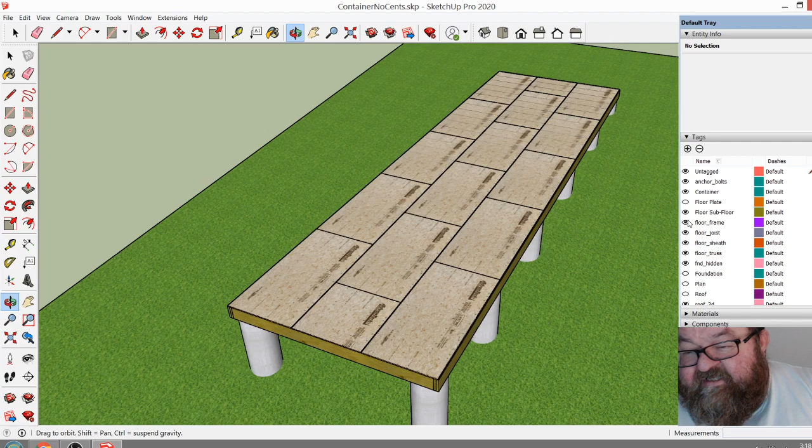So I wanted to get back to this point where I show how easy it would be to frame up a floor system just using 12-foot 2x10s.

That brings me to my first point about this: it's hard to live in a container, okay? The inside dimensions of a container are like 8 feet, and by the time you add your framing to get your insulation requirements, you're down to almost 7 feet. I'm a short guy, and I can almost reach end to end - I can spread out my arms and almost touch the walls.

As a matter of fact, we had a guy who used to work with us, a homeless guy I was trying to help get on his feet. He was like 6'6", and his wingspan was almost 7 feet. He could stand in a room and almost reach from wall to wall in a small house.

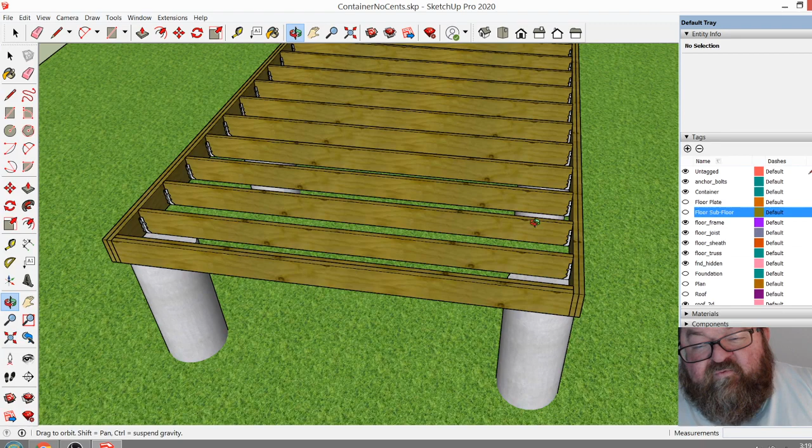But anyway, to me, if you're going to build a small home, a tiny home, make it 12 feet wide, and I'm going to show you why. The main reason is efficiency - when you start buying joists, like 2x10 joists, you'll find they easily span 12 feet. They'll actually span like 14 feet, but I think 12 feet keeps close to the dimensions of a container, and this would be very strong because they'll span a little more than this.

Now if you're going to do this foundation on a pier system like this, you'd have to double your outside band - your header joist would have to be doubled. It becomes a beam that spans between these, and you'd also have to put joist hangers on your joists.

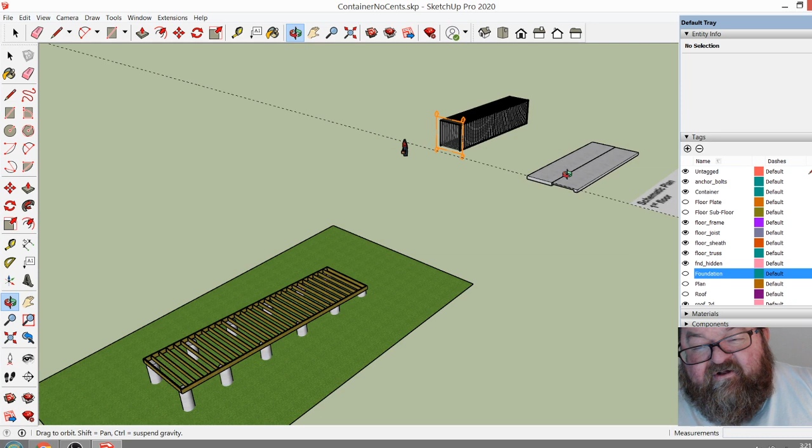Even if you had a flat yard, a flat lot you thought was flat, and you went out to form up a concrete slab, you'd see, wow, it's like 16 inches on one end and 8 on the other.

When you start paying for concrete for a slab, you realize how out of flat the Earth is.

The reason I was showing you this option is because I am going to do an option where you have a slab on there. But for now, I'm going to do this one.

I had a question earlier from a viewer today on one of my other videos about wall sheeting. I do want to let James know I'm going to get to that here in a bit. Be a little patient with me. I just wanted to go through the phases.

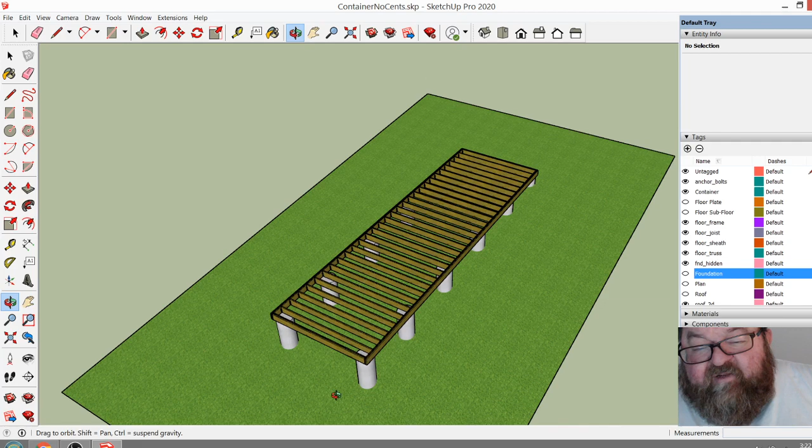Then what we're going to do is when we're done, we're going to add up all these, count the joists and all of our band and everything, and go to Home Depot to check the prices and see how much framing we can actually get. For this square footage, I'm guessing for the price of a container itself, I could probably frame up a bigger, more comfortable tiny home.

So, after your floor framing, you would have your subfloor. Where's my subfloor? I don't normally have this many layers. You would have your Advantech there, which is pretty common nowadays, and very efficient.

You would have 3 sheets wide, that's 12 feet, and 8 feet, or 5 pieces long, 1, 2, 3, 4, 5. By the way, this is 12 by 40. I don't really like the 40-foot length. I think that's probably too long for a tiny house.

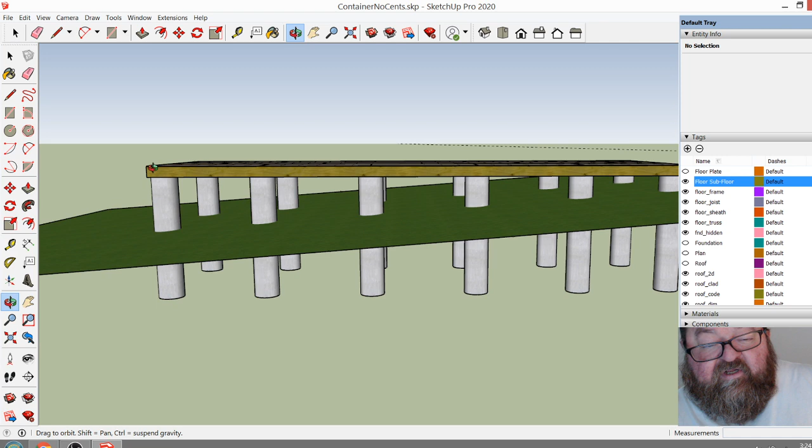What I would normally do is make the house more of a shorter rectangle, so it didn't take up so much of a footprint. Because you can see, and these sonotubes wouldn't be this long, but you can see that the longer your building is, the more it's going to come off the ground if you have a slope. So typically when we're designing for a lot, we look at the slope and take all that into consideration.

But then we would go to our wall framing, and this is where we get into setting the plates back. This is a question that a fellow named James had earlier, and I told him I would look at it in this video. So what we do is we set our walls back a half inch so that the wall sheeting...

...can set. That's funny, I got the Tyvek turned on that one, but so that it can set flush with the band that you're framing.

The reason we do that is there's several reasons. First of all, it's kind of a waste of material if you set the wall out. If you set the framing even with the band and the OSB hangs over, then you've got to fur out this band.

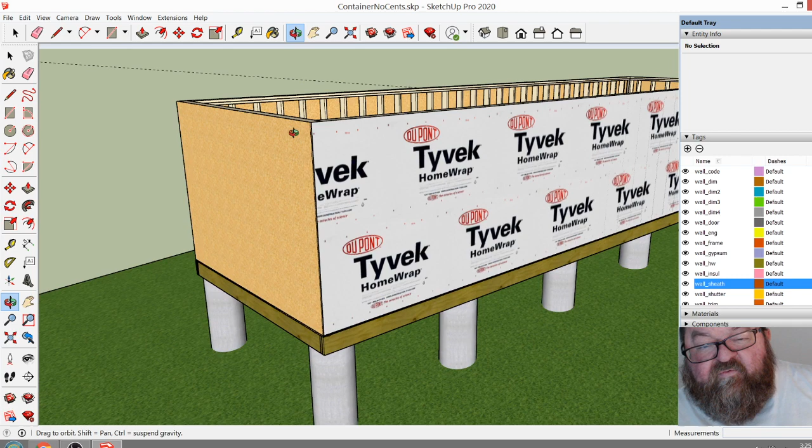So that's extra OSB that you've got to rip, and you might not think that's a lot, but that's basically 12 inches times 40. If you've got 8 times, you get 32. So that's 1, 2, 3, 4 - another 4 sheets of OSB. It doesn't sound like a lot, but you've got to cut it, rip it down, nail it on, and then you create this weird joint here.

In any event, it's not necessary. The other issue is bracing, wall bracing. The function of your OSB is to be nailed, and this extension I'm using, which is Medeek wall extension - how I draw these walls, and I'm going to draw some walls in a minute with it, so you'll see how it works - but it doesn't draw the joints in the plywood, the OSB.

Back when I was a kid, we used plywood. Now we use OSB 48. So that would be where your first joint is. The point here is that OSB is required to be nailed on all four edges.

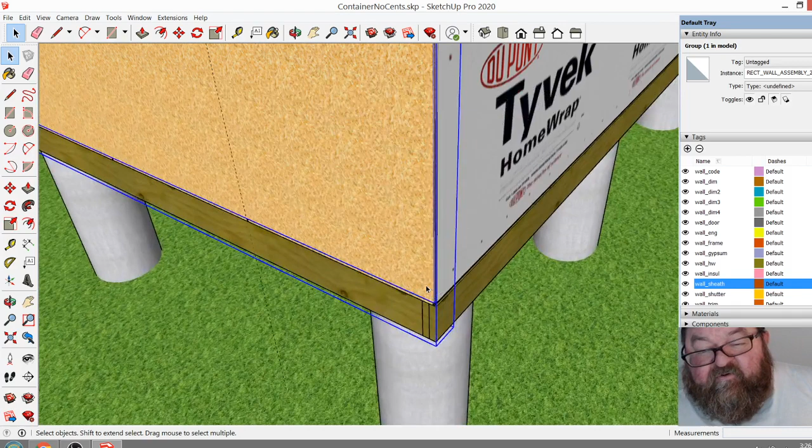And if you drop - and this was a question I got also - he was saying that some carpenters drop this down. Well, first of all, the wall in his scenario would be moved out a half inch, and then it would be moved down. They would move it down here.

I probably should just move the whole wall because I'm going to demonstrate something here. Let me see if I can just move the whole wall. I don't want to mess up my - I guess I've already done it. Oh no, I am moving it. Cool, okay.

If the OSB is out here, you can see I've scooted that whole wall out. And it wouldn't be out that far, sorry about the scrolling - it would be right here, basically. Then, if it was dropped down, let's drop this down.

Okay, you would have this gap up here. You see, the reason that OSB is 8 feet long is because it works out with your walls.

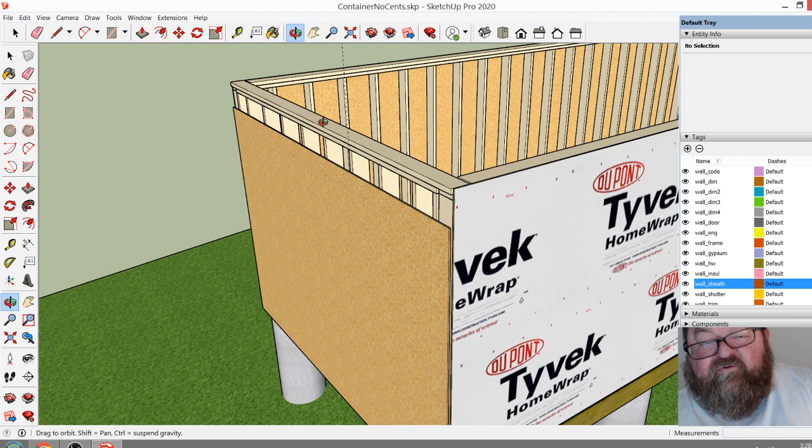Your wall is 8'1" and 1/8, and your studs are 92 5/8. By the time you nail a bottom plate and then a double, 2 top plates—the reason we have 2 top plates is to overlap walls at the corners and intersecting walls, so that it's very strong—but by the time you add that 4.5 inches to 92 5/8, you get 8'1" and 1/8. What that does is allow you enough room to put, say, 3/4 of an inch hardwood flooring, and then half inch to 3/4 inch ceiling material, and still have an 8-foot ceiling.

So you should see here, OSB is not made to span. The edges won't span between studs. You have to nail it at a minimum of 8 inches on center. That's in the field. You're supposed to nail it 6 inches on center around the edges.

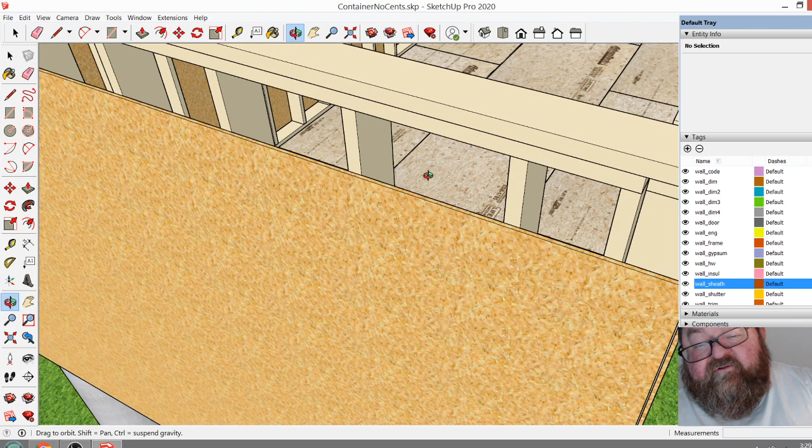So there would be 2 nails out here, and there would be nothing to nail to. You would have to block—put blocking between the studs just to have a nail. If a building inspector caught you doing this, that would be a good building inspector. One who didn't care would just say, that's cool.

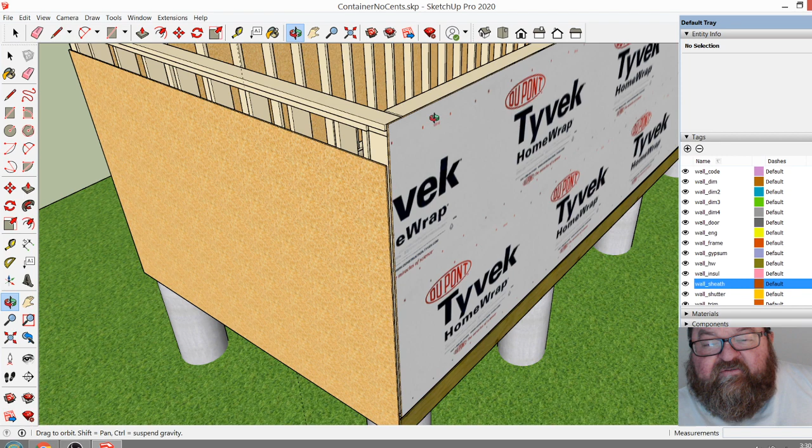The purpose of the sheeting is actually to provide bracing for the wall. There are many different types of wall sheeting. Back in the old days, we used what was called blackboard. It was sort of a crappy, lightweight board impregnated with asphalt—that's why we call it blackboard. It was like an insulation board. We would put plywood on the corners, and then we would put that stuff in the field, in between the corners.

Now OSB is so cheap that we just put it—let's move this back up—on the entire house, and it's actually very strong. It makes the house very strong, and your strength axis in OSB is vertically.

In other words, let's move the wall back—let's go back to where the wall's back there. So the reason we don't install the OSB horizontally is also the same reason.

We would have to block between the studs at 4 feet all the way, wasting material and labor. The labor on installing blocking between every stud is significant—I could frame up probably all these walls in the same amount of time that I just ran blocking between one wall. So it's a lot of labor, a lot of cutting for no reason.

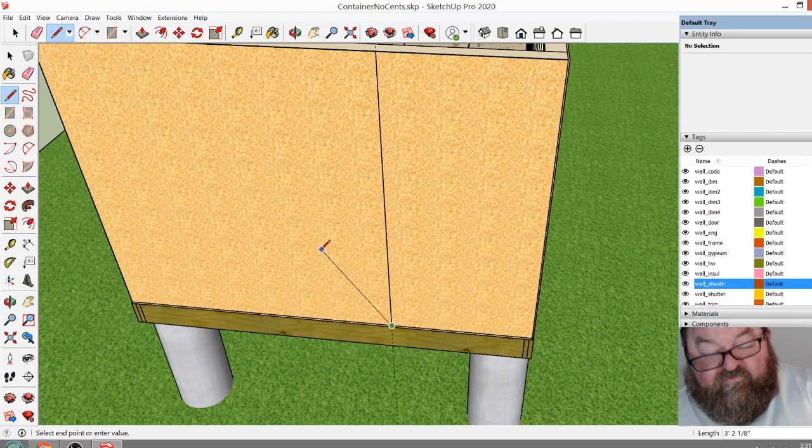We follow best practices and the way manufacturers recommend or stipulate how materials are to be used, and therefore we save time and money. All of these edges now—I would have a joint here, this extension doesn't put joints in the plywood—but every 4 feet I would have a joint, and there would be a stud or the top plate or the bottom plate all the way around this sheet.

They would be nailed 6 inches around the edges and then 8 inches in the 2 studs that are in the field in the middle of the sheet. So that's how that's done, and that's why we put our sheets the way we do. They're designed—and I was going to go back to the strength axis.

When you put up a sheet of OSB, you have this diagonal bracing effect here, because of the way it's nailed. This would replace the old style diagonal bracing that we used to put in walls.

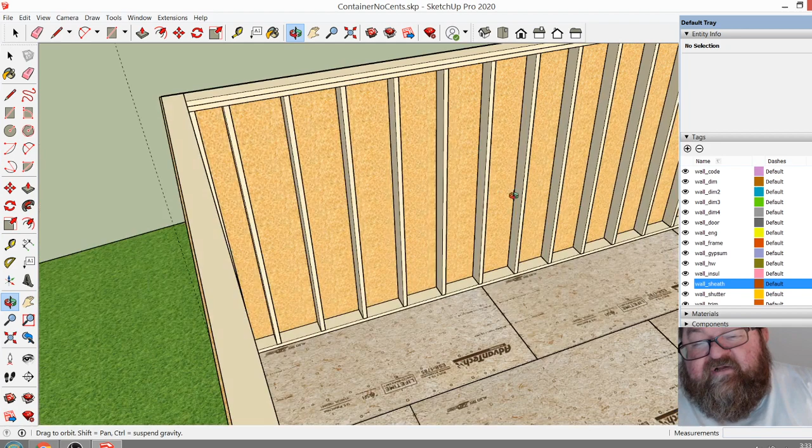Back in the old days when I first started in 1978, we would take a 1x4 and notch it into the studs so it was flush. That was our wall bracing, because we would put that crappy sheeting up on the outside and it provided no strength. There was no lateral bracing that way.

We had to put those corner braces up. Then in the 80s, they came out with metal straps that we would put up. They were 10 feet long, and we'd nail them up here, bring them down, nail them off at each stud where they fit. But those were kind of crappy because they were face nailed to the studs. They'd make your drywall lumpy sometimes if you didn't get them nailed good and flat.

But when OSB came out and we started using it, that was the answer. It gave us our sheeting, and it gave us our bracing for our walls.

Now the code also has requirements for shear walls, and I think it's like 30 feet—I'll have to go look. It's rare that you see a 40-foot wall by itself without any kind of intermediate wall, and that's what we're going to do here in just a little bit.

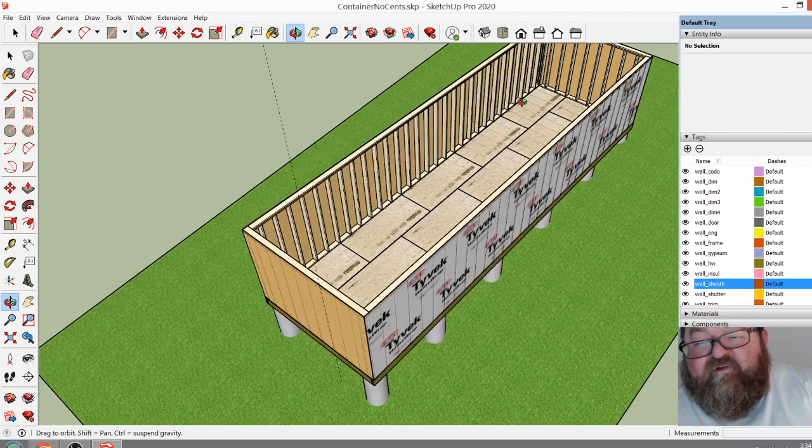We're going to put up some bedroom walls and closet walls. All those interior walls act as sort of shear walls. In other words, these big long walls, when they're hit with wind, they'll want to deflect inward and bounce around like a drum.

Those interior walls act like bracing. If you don't have interior walls, you would actually have to put several shear walls—I'm pretty sure they have to be at least 4 feet long. You would have to enter this into your design in some way to get them in here. You couldn't just build this 40-foot wall uninterrupted.

In length, you would have to have shear wall. Either that, or you would have to come and make a section of this wall—I think it's like 4 feet every 30 feet, something like that—that would have extra bracing in it.

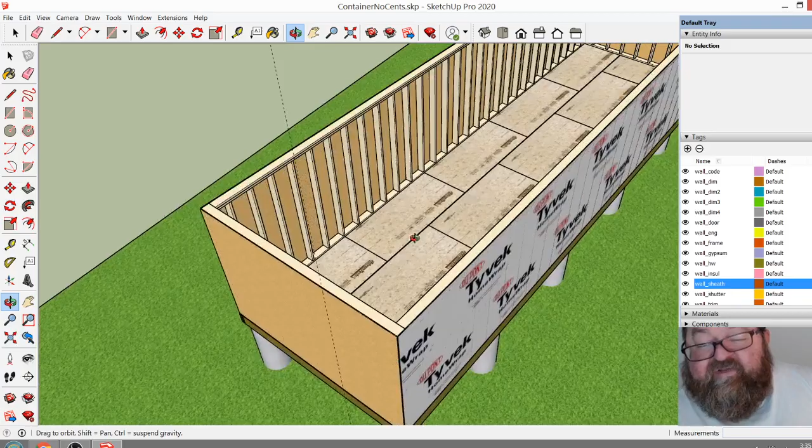There are different ways to obtain your bracing, but the easiest way is to have a decent plan where you have some interior walls, and then have your OSB on the outside. Now already you can see that this 12 feet is going to give you a standard living space inside.

And I promise you, when we add up all these materials—I saw my camera flash. Did I lose my camera? I saw the light on my camera flash. That's weird.

So I hope that answers the question of the sheeting. The other thing we don't do is let the corners overlap each other. This is the way it's done—the sheeting is just nailed, and it comes to the corner of the stud. You can't really get any closer.

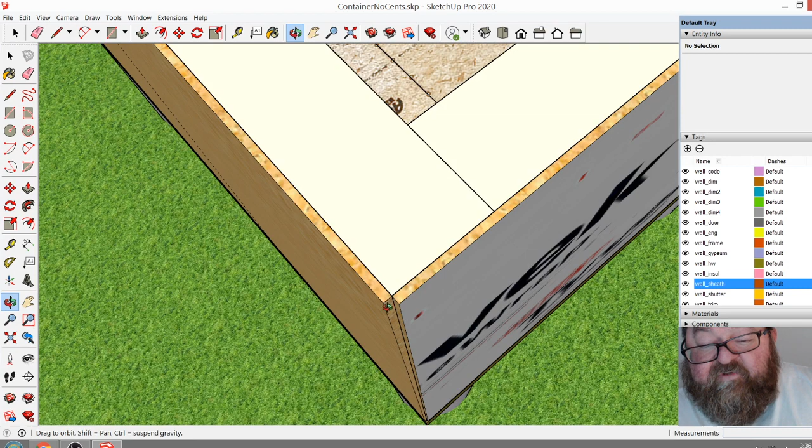But if you try to let this lap over that one, or vice versa, first of all you screw up your layout, because when you're laying out your studs, the layout is from the end of the wall, right? So you'd be a half inch off on your layout. The other reason is if you let one of these hang over past the other, you inevitably would have a lumpy corner, because one of them's a cut edge. We just don't do that.

It makes a crisper corner when you go to start putting on your corner trim—you don't have anything there getting in the way. So if you have a corner board, it wraps nicely around the corner, and you don't have any lumpy stuff overlapping there. And of course, the main reason is the layout issue.

So what I was going to do is bring up this option right here. I was trying to show people the point I made with this one was to get your insulation requirements inside. I think this framing is actually even bigger.

If you were to put this framing on the inside, I think I used the exterior dimension of the... can, the rust bucket. Let's see.

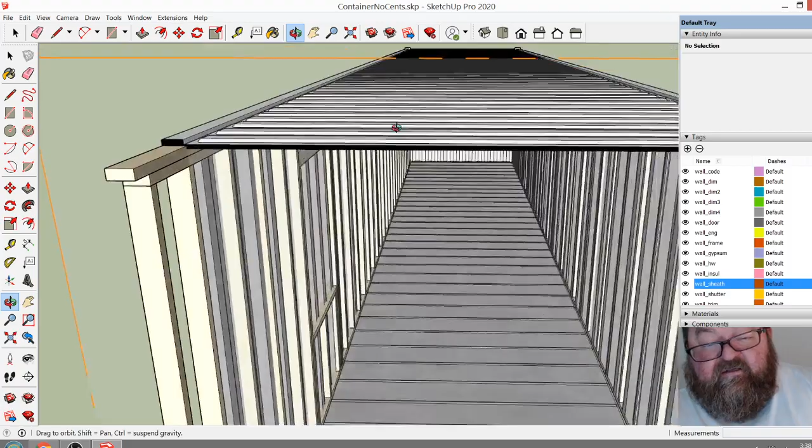Yeah, you see, you would have even less—about 7 feet basically inside, which is really not enough room to live. What you're doing is spending more money on something that forces you to have an uncomfortable living space. It's kind of ridiculous if you think about it.

People, humans need a certain amount of space to live in, and I've determined that 12 feet is optimal. That's the best width for a tiny home—I think 12 feet is the key. That's based on many years of building floor systems with just one span of joist that will span that far, and you want to stretch out your joist in an efficient manner.

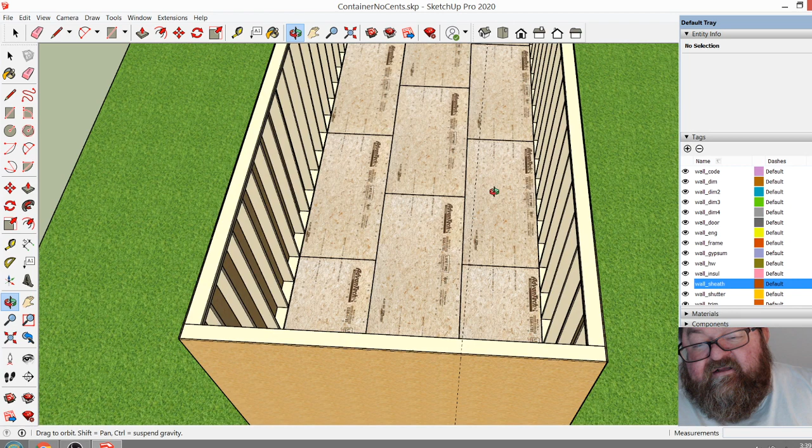There's no reason. Imagine this: if I had made this 10 feet instead of 12 feet, I would still have to use 2x10s, and I would still have to buy 3 sheets of OSB or Advantech to get that width. You see, if I go 12 foot, I've just bought a 12-foot joist, and if I'm buying 3 sheets, it'll cover 12 feet.

You've got to think about efficiency and the amount of space that you're going to need. The other thing that's kind of misleading, the biggest thing that's misleading about container homes—

I had this plan, I took it, I guess, somewhere off the internet. They're showing this bed basically takes up this entire bedroom, which is ridiculous. And these bedrooms don't even meet code. I'm pretty sure the code requires at least 75 square feet for the first person and 50 additional square feet, so you're talking about 125 square feet for a 2-person room. This room is only 7 feet by, what are they calling it here? Well, you can imagine it would have to be over 12 feet, it would have to be very long.

So these rooms don't meet actual code. You can get by with this stuff if you're out in a rural area where there's no building codes, but if you're going to be in an area with building codes, you're going to have minimum standards to follow. So I thought I would turn on this layer I've got called Plan.

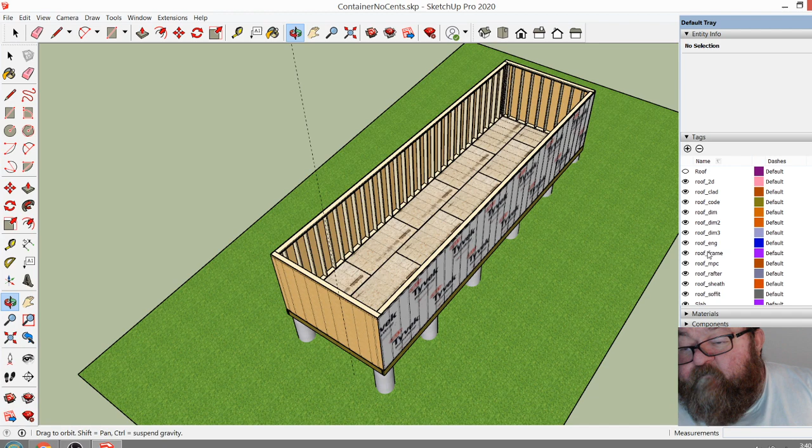I'm going to turn off the Advantech so it doesn't interfere, and I thought I would just lay out some rooms. Let me see if there's any questions so far.

No questions. Am I private again? I'm not. This morning it was so frustrating—I did this once and had it set on private, so the whole time I was thinking, not one person wants to see me rant about container homes. It's kind of funny.

But what I'm going to do is just do this on the fly, okay? I haven't really thought about this, but I think in my head I've come up with a pretty decent plan. I think a bedroom, for me, a minimum bedroom is 10 by 12, okay?

Let me just double click—I've got this floor, yeah, there we go. So I'm going to come over here 10 feet, and I'm going to come over 4.5 inches. I'm going to make the interior walls 4.5, that's a 2x4 stud with drywall on both sides. Let's see though, you know what—

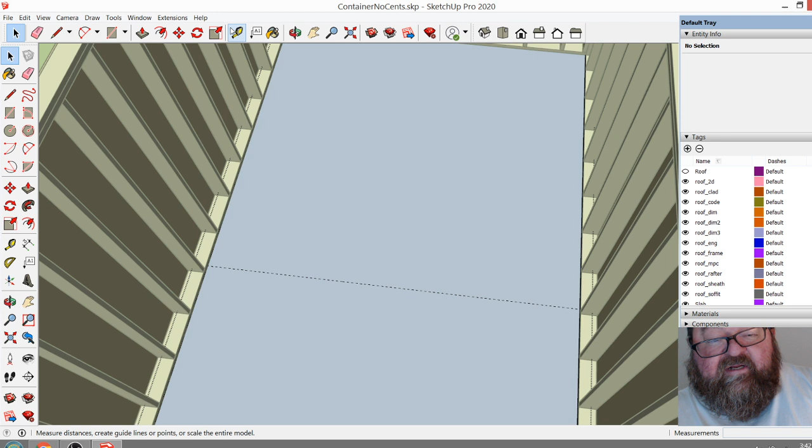I think this extension only draws... I'm going to draw them 3.5 for right now. I'm just going to draw the framing dimensions for right now, 3.5. Now that means I would normally add that half inch, but that's getting kind of nitpicky, so I'm not going to worry about that right now. Okay, so now that would be our bedroom.

Okay, that's a decent sized room. And if you're going to live in a tiny house, it's not like you're going to have 6 kids in this place, okay? You'll see in a minute, the idea I've got for the living area is kind of a multifunctional area. So the other thing is, we would need a bathroom.

You actually would need a closet. I haven't quite thought this through. I think I was going to run the bathroom 5 feet this way—or actually, no, it would have to run 8 foot. I always like my bathroom at 8'6".

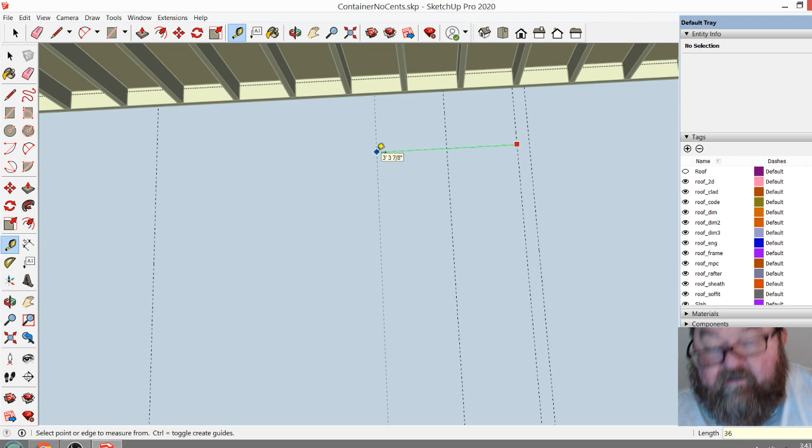Now that might be a little bit big for this, but you need, I like to have at least a 30-inch vanity—see how small that looks? And then you have to have at least, I think I do 36, let's do 36. Oh, I know what happened, that line wasn't right, that's what it was. And then we'll do 30 inches for the toilet.

For some reason—I've got a new computer coming, but this one's all screwed up. And then let's see, this would be, yeah, you could probably get by. I like my 8'6", okay? I'm going to leave it at that for right now, unless I have to move it over.

So you'd have a 36-inch vanity, 30 inches for the toilet, and your tub width. And then your tub would be 5 feet this way, okay? And then you'd have another 3.5-inch wall, okay, so that's that. Now let's see, we'd want at least a 3—

I was going to try to work out a closet here. We're really supposed to have a 3 foot... 36, oh, I think it's going to work out. Yeah, let's make that—let's see if we just come 2 feet for our closet. Yeah, we can get a little bit bigger hallway, and that's what we need to do, because the hallways get kind of, how much difference is there?

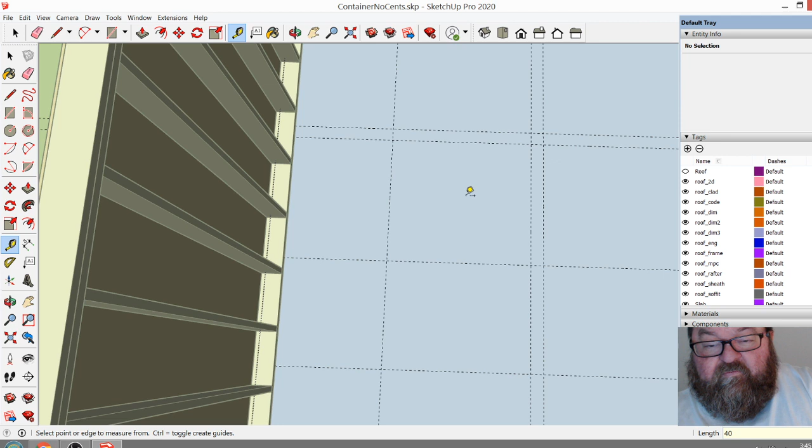8 inches. Let's make this 40. When you've got a long hallway, let's see, 3 foot 4. What would that leave us? 3.5. And I'm not looking for, you know, your standard closet is 2 feet. That gives me 2 feet 1. All right, let's leave it like that.

I like having this hallway here a little bit wider than normal because, you know, if you've got a couple of people, somebody trying to go into the restroom, somebody trying to get into the closet. And then what we would do, so we go ahead and have a door on there.

Let's see, I don't want to draw too many lines. What are they spinning around? I don't want to draw too many lines until I see if I've got enough room to get my kitchen in that I want to do.

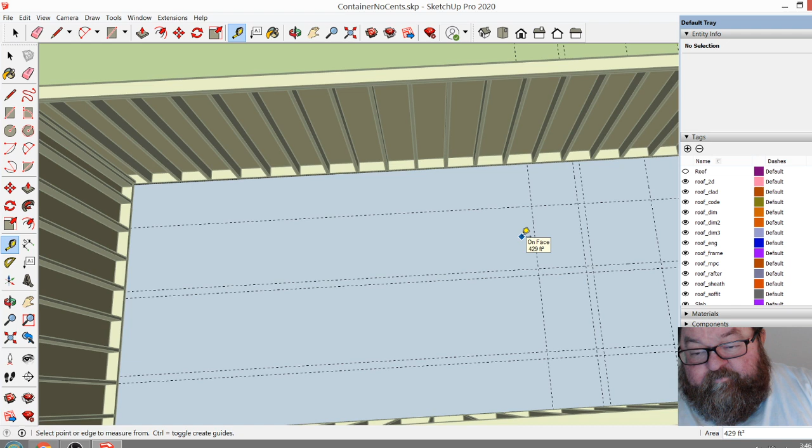So then I would have a counter here. It'd be 25 and then 25 off here. I always like to account for that 1-inch overhang. And then this would be, you'd want to come back, yeah, 5 feet. You'd want to just come to there with your cabinets. You want to go 3-inch increments.

And in this direction, let's see, before I go that direction, I want to have about, it'd be nice to have at least 10 feet coming back this way too. 10 feet. Yeah, that's going to be a nice little area. Not bad. And then this, we want to go 3-inch increments. So what is that? 7 foot 10.

That's 84, 94. So let's just go 90. And then we'd go back, and that would be our countertops. So I feel pretty comfortable now in trying to draw my walls in.

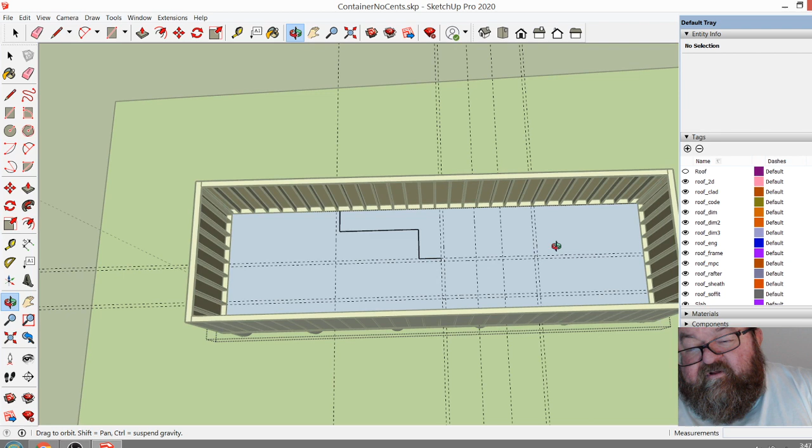Yeah, because what's going to happen is I'm going to have bedroom, bathroom, closet, and then you'd have a little space for an eating table right here. Then all this will be living area, and I'm going to try to work in a wood stove probably in this corner here. The reason I'm doing kind of a rough layout is because I have an idea for a porch that I think would work well.

So let me see, I may have to draw these walls just out of, I don't want to spend a lot of time drawing these walls. So let me see if I can just draw these walls right quick with making a quick, let's see, 8-foot framed wall.

Okay, let's load that. Let's see what that does. Which side? Yeah, that's on the right side. There we go. And why am I up in the air? Why am I? Oh, somehow I got up.

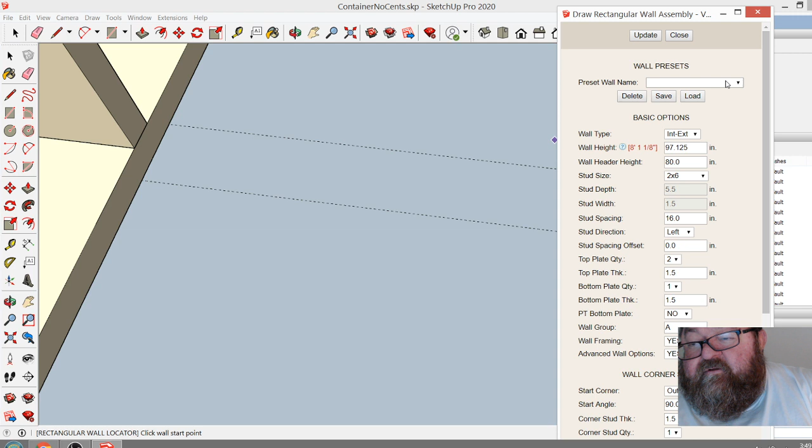Let's undo that. Somehow I got up in the air. Let's do that again. Let's start out down here low. Wall. 8-foot framed wall, load. Let's start down there. There we go. That's cool.

And then we would have one, let's see, we want to do our long walls first. So we'd want to do this next wall right here.

I have to close this, and I'm getting used to the new Medeek Wall for 2020. He made some, I can't load. He made some changes, which are cool. All of his extensions are really awesome, and you can see what kind of time they can save you.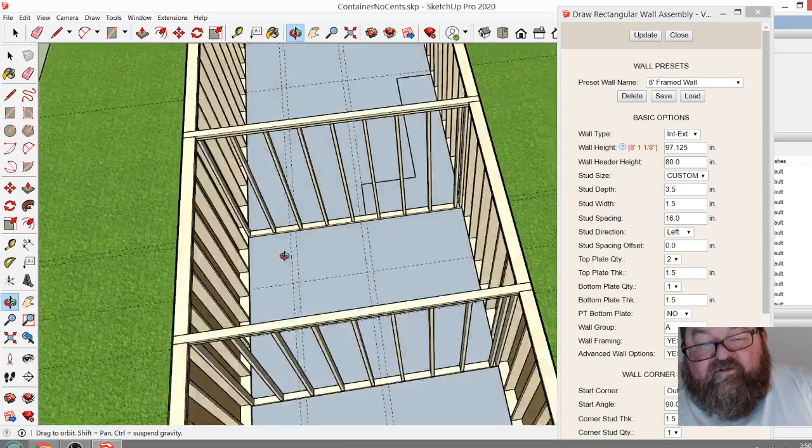Especially if you're like me and you want to do these material takeoffs, and the way you can make it easier doing the material takeoffs is that you draw all the studs and all the materials that you're going to actually have on the job.

You draw them. And can I draw another one? Oh, I got it. Okay. Do I have to load that every time, or will it?

I think it's the way I'm doing it is this. It's designed so that you just keep drawing in, linearly. You draw your walls. The way I've laid it out, they're all kind of segmented. So I just kind of restart it each time.

8-foot framed wall, load. I'm going to hit the load button whether I need to or not. It just makes me, what in the world? Where did I get to? That was weird.

There we go. That's really funny, that would be all your walls on the inside.

Now let's put some doors in. We'll see how this works. I wonder how intuitive this thing is. I don't have my center lines marked on the doors. Let's see what it will do.

Door. So these only need to be 2 feet, 8 inches. We typically use 2 2x10s, just because that's the way it goes. And right now we're just going to put...

That's pretty intuitive, I didn't have to do much there. It felt like it centered itself. That's cool, so you can see how awesome that is.

And then this door, let's see what we want to do here. Let me get out of this for a second. This door would be on this end here, and it would swing in towards your vanity. So that door would be a 2/6 door.

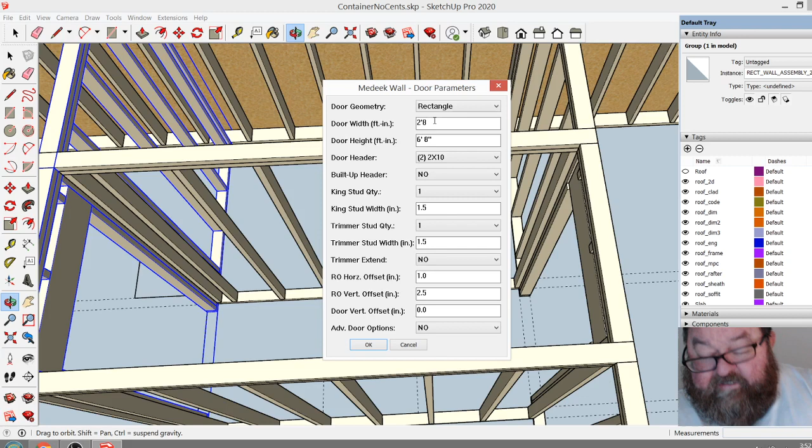Let's go back to our doors. 2'6", because the bathroom door is 2'6", and we'll put it right there. That looks good, and that's your 3 doors.

Oh, our closet door. Now in the closet door, I think what you're going to want to do here is just make it like probably a 5-foot door. You probably want... now one thing I thought was you could build a little closet on the end of this for linens or something. You could get fancy if you wanted to, but I think what might be best is just keep it simple and make this door big enough to where you can get to the whole inside of this closet. Let's see, door, so we're going to make it...

Oh, he wants it in feet, 5 feet. Okay, and we'll see if we can center it. Where's the center? There we go. Now see, I think you can reach... yeah. See, if you had shelving in there, you could get back to that back end corner on each side. That's good enough.

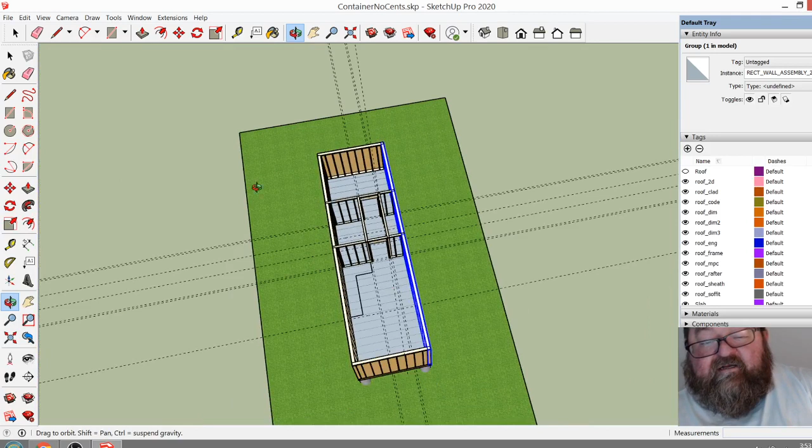All right, so now I can delete all my construction lines I had. Oh, I know what's wrong, they're in that group. We can clean that up. Come on, erase, erase. And now I can turn off... let's see, did I put that in? No, I didn't. So if I turn off this floor plan... oops. Oh, I gotta turn on my floor sheeting. And then turn on, let's see, go up here, floor, subfloor, there we go.

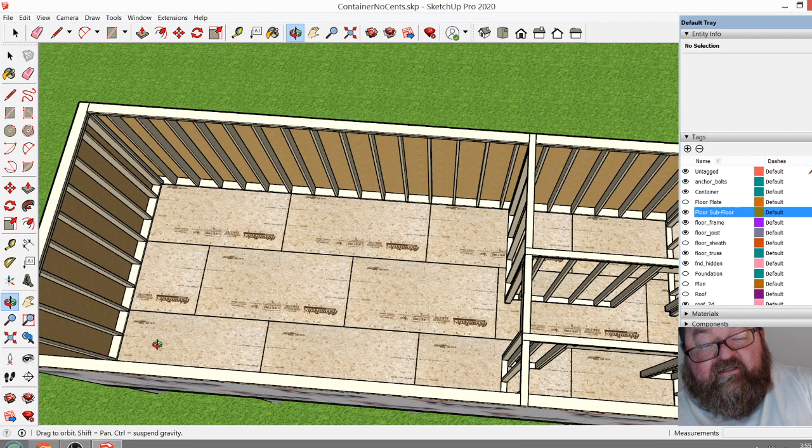But you can see that's basically all your walls. And this gives you a neat bedroom area, big enough. This is a standard spec house bedroom. Gives you closet, bathroom, and what you would do is you would put a door here and here, and that way if you had guests, you'd have like a sofa bed, a sofa that makes a bed. So in effect, you could sleep 4 to 6 people in this thing if you want to.

Now the next thing I wanted to kind of show, see if I have any comments or questions. What? No comments or questions? You people are boring. I'm just kidding.

So the thing I was going to try to come up with next is kind of a cool roof for this, because unlike container homes that are boring and rusty cans and will kill you if you lived in them long enough, because there's no way to get fresh air in there. I'm just kidding.

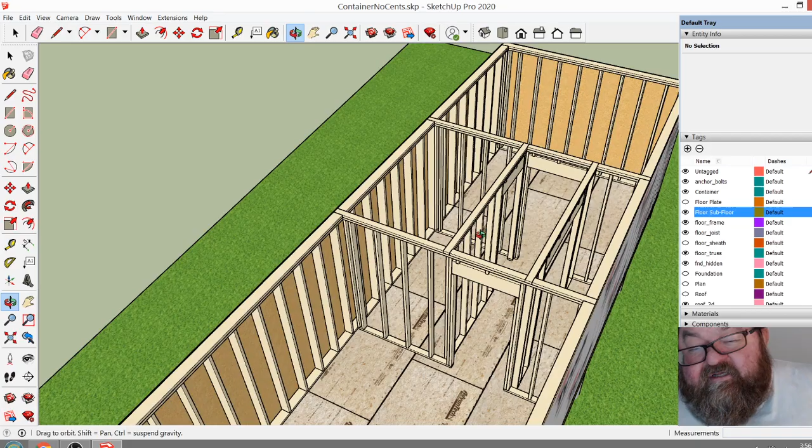I'm voicing all my hate for container homes, but you can see what we've done with just a few, what, 30 or 40 studs on these inside walls, some plate material, some headers. I mean, it's nothing, right? You would have framed up these walls anyway on the inside of your rust bucket, just to get your insulation requirements. And this is one thing I harped on last time, people say oh no, I'm just going to spray foam the walls. You have to have something to attach your drywall to unless you're going to paint the spray foam. And I can tell you right now, spray foam is ugly, it's not very pretty as a finished surface.

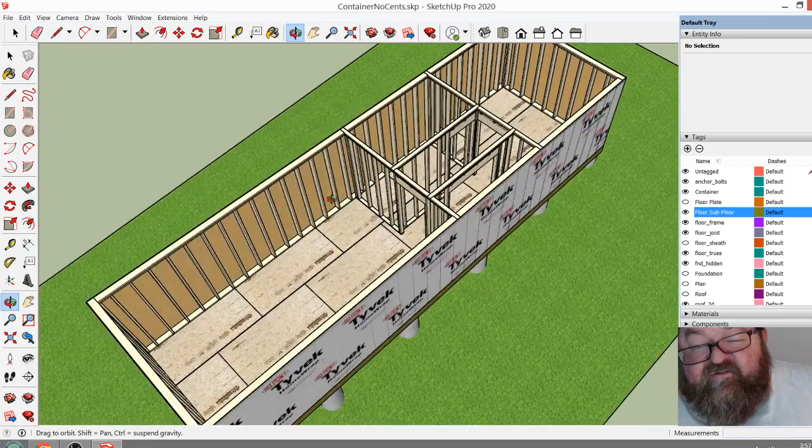You're going to end up putting nailers, which are called studs, on the inside, just like I've got shown right here. You basically would have your walls framed up. So my point is that for the price of that container, you can buy all this stuff. And it's new, it's freshly made, it's designed the way you want it, it's big enough to live in.

Let me just demonstrate something here. I'm going to take this container, I'm going to move it over here. Okay, and I'm going to show you how much space you're losing by using these crazy things. I'm going to move this back.

Okay, so the inside of these containers is like 8 feet, a little less than 8 feet. By the time you frame them out, you basically have no room to live in there. I don't know if that demonstrated that to you, but I would never waste my money on a shipping container. It's terrible. So what I'm looking at now is an idea.

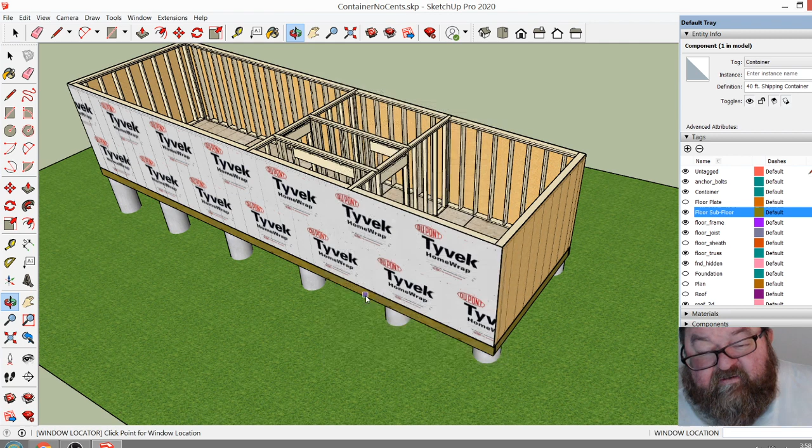Let's pop a few windows in here just for the fun of it, because I want to bring up a point about windows. We'll just leave these alone, put them in the way they are for right now. Let's just put one. Can I get to the center of this room? Up there. Am I hitting it right?

It's okay. Other point I wanted to make about windows and doors is that the way we build is in sequence. There's a reason for the sequence: you frame first, you do your sheeting, and then you put your house wrap on, your Tyvek, which is a miracle material. It allows water vapor to pass out of your building, which is created by you living in your building. If there's anything true about man-made climate, it's you farting inside of your bedroom. Okay, that's man-made climate change. But Tyvek allows water vapor to come out, but it doesn't allow water droplets, water molecules to go back in.

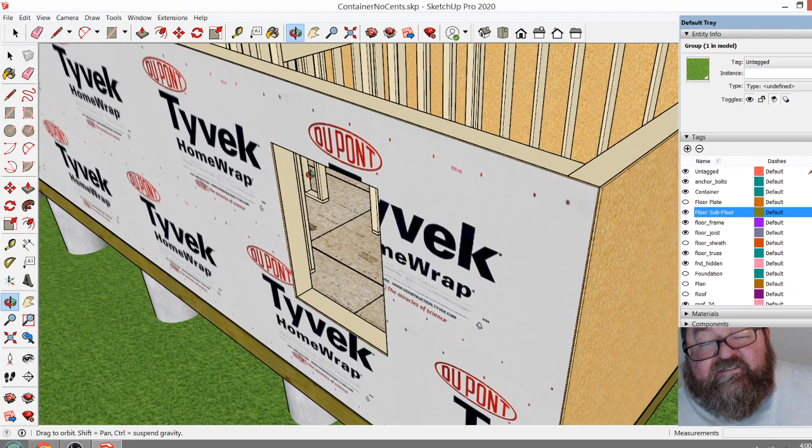Okay, just remember this is junk over here, and this is science right here. The other thing is when you put your windows in, your windows have a flange, and you tape, you install - do a search on Tyvek window installation, Tyvek and Tyvek tape window installation. What you'll see is they cut this upper part at an angle that's raised up as a flap. We install our windows - when I say they, it's me, I'm a builder. We install our windows, we tape around them, and we lower that flap over the top flange, and that gets taped. It's all very much a system.

Okay, when you try to put a window in a container home, the best that I've ever seen anybody do is they'll cut a hole. They'll take a torch or a sawzall or something, they'll cut a hole, and you never see them, you never see how they install the windows. Never. If someone can show me a video of someone installing a window into a container home, I'd love to see it, because there's really no way to seal properly around a window.

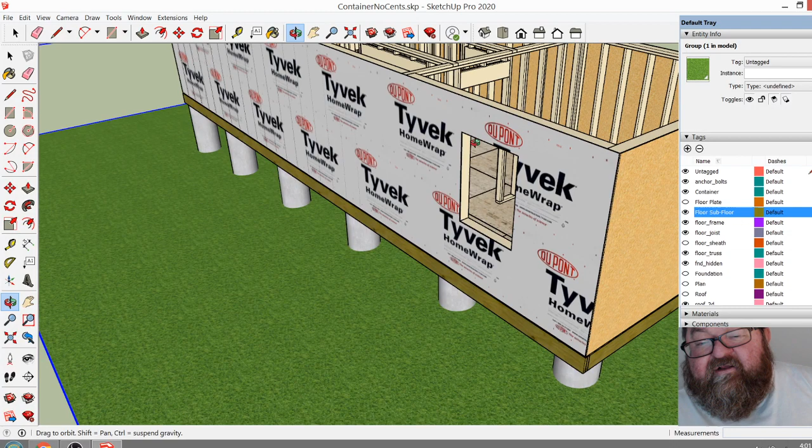The only thing you can do is cut a hole big enough so that you can frame in a regular opening like this. Say you cut a big swath of siding out of the side of a container, and you framed up your opening the way you were supposed to, and then you put your Tyvek around it and you taped it, and that's fine. But then you got to go back - it's really building in reverse. It's backwards thinking. Shipping containers are backwards thinking. It's like going and living in a cave again. And we moved out of caves, so sorry about that.

So anyway, what we'd have here, we'd have our front door. Let's put our door in, we're going to call it 36. We'll just leave everything else alone for now, and we're going to put it close to here because we don't want to waste any wall space. We'd let that door open against - we'd probably move it, I usually put 3 2x4 widths here, I don't put them that close. As a matter of fact, I'm going to undo that and see if I can do it from this side so I can see.

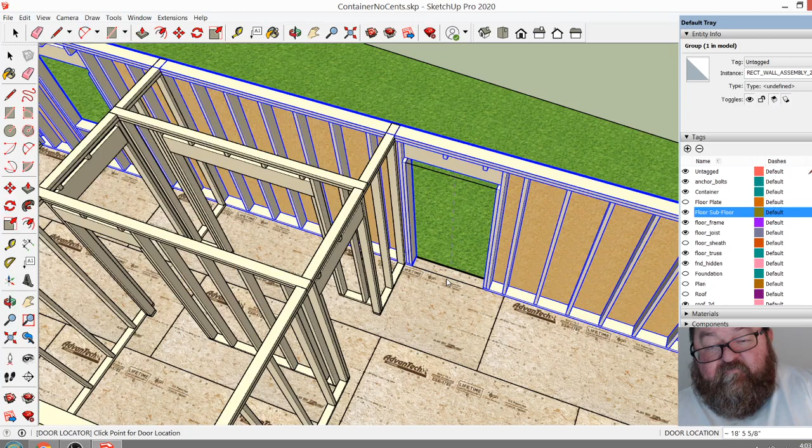Put it right there, yeah, that's more like it. You want a good space, you want space when you're framing these. You really want 3 2x4s. You want a stud, you would have a stud right here that's your T. They don't really put this extension - doesn't put the T's in the wall, which is how you join 2 walls together. So you'd have 1.5 inches there, then you'd have your king stud and your jack, so you'd have 4.5 inches here. That gives you room to put on a wide trim and still have a little corner there, drywall. But your door would swing back this way, and that's an efficient use of space. Now, the other thing that I wanted to do was to have a big...

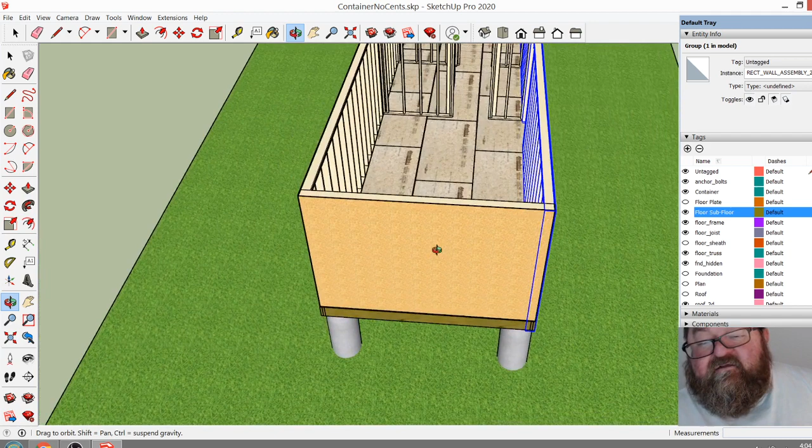I'm assuming the reason we oriented our shipping container home in this direction is because we had a view, probably on the end. So let's put a window here. The nice thing about these windows is we can change them. Let's make it two 3-footers, so 6 foot by 4 foot 6 — that's a nice proportion. We'll get it centered here.

That's going to be your view, your one splurge when you're sitting in your living area. You still want a little wall space on each side, especially for putting your wood stove in this corner, a sofa and coffee table. You'd have enough room for another chair, like a lounge chair with a beer cooler next to it.

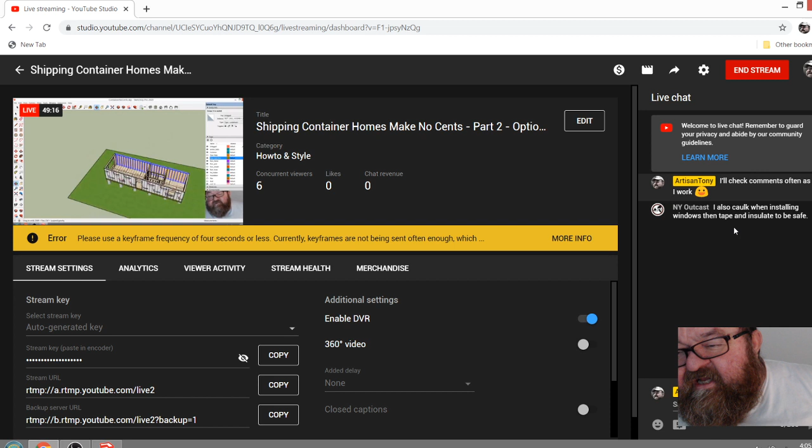Someone mentioned caulking when installing windows — you're right. I'm not explaining the entire process, that's why I said go watch the Tyvek video, it's really good. It shows caulking around before you install the windows, caulk behind the flange, then tape over the flange. I guess what I was trying to do quickly is show people how much easier it would be to frame up their own tiny home and have more space and save money. But the internet doesn't always like that kind of stuff.

So what I'll do here is put that same size, pretending like we have a view both ways. Honestly, I don't like putting a lot of large windows in homes. Let's center this one over that pier right there.

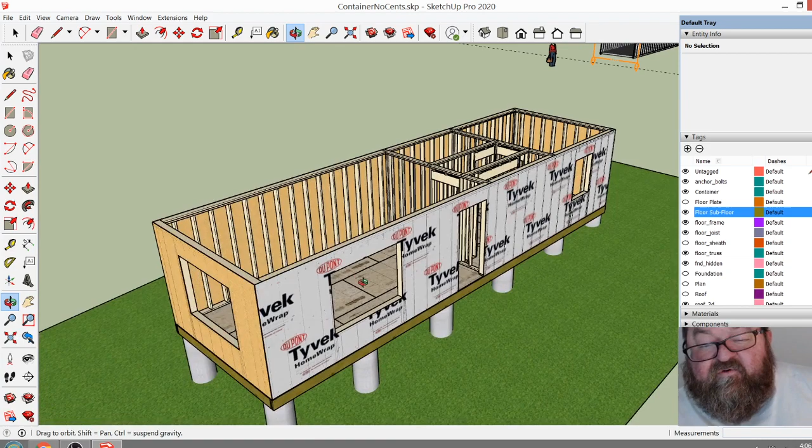Your windows are your largest energy inefficient element — not efficient. The R-value of your glass is maybe 1, depending on what kind of window you buy. Most people don't spend that kind of money on windows, so the more glass you have, the more heat loss and heat gain you're going to have.

So let's say this window meets egress. The other thing is in your bedrooms, you want to leave at least two walls for furniture, because you know how women are — they're going to want to come in and say, should the bed go here or should the bed go here. So you don't want to put windows on every wall in a bedroom, unless you're going to put a bed in front of the window, which is fine I guess.

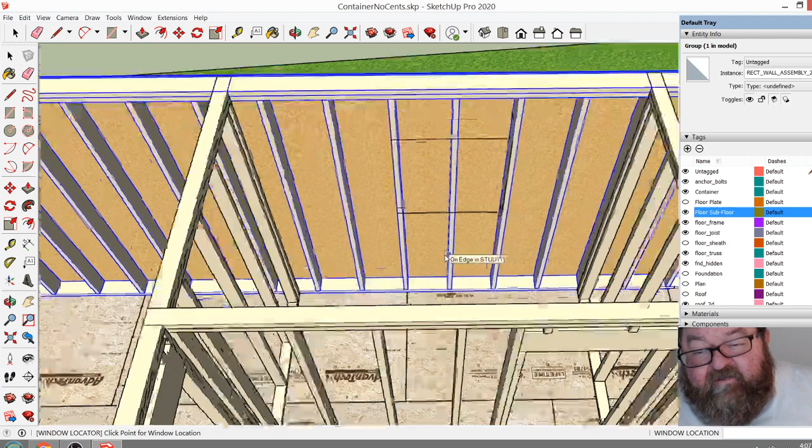Mainly my thing is you want enough natural light in every room. As a matter of fact, I put windows in my potty rooms, yes I do, but a small one. Usually I'll make it smaller than this, around 2'8" by 2'8", a smaller window, and that'll go right above the toilet, right there somewhere. That's really kind of big looking, now that I look at it.

I can't remember — these 28 by 28 windows I buy, these vinyl awning windows, are really cool, I like putting them in bathrooms, but I'd make it 30 by 30, not 32, so it's 2.6 by 2.6. You just want it over the toilet space, and leave wall space for your vanity, mirror, medicine cabinet, with the shower on that end.

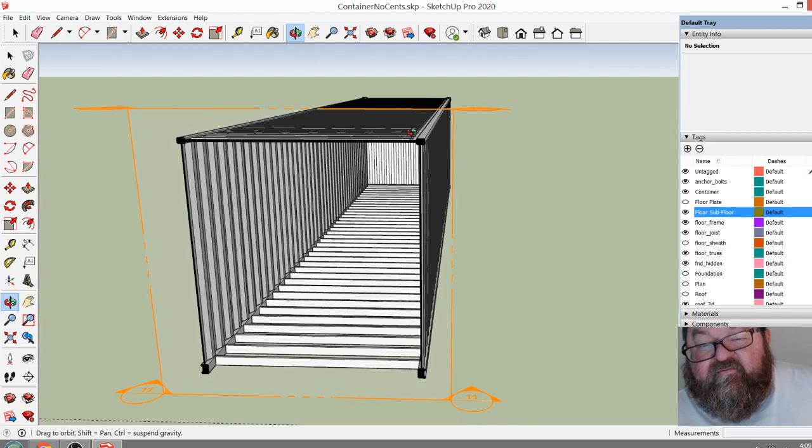So the point is, you've got natural light in every room, okay? This is kind of going overboard, but I'm trying to give a little here on design issues. What's funny is you'll see people cut big holes in these containers, expecting that top channel to carry the load of the roof, but it really won't. The channels on top of these containers are really small, not that big. They've got a big channel down here to carry the floor load, but the containers aren't designed to carry loads except on the corners.

You see, they have these corner posts that when they're stacked on top of each other, these are connection areas. They use these areas to put bracing rods. When they stack them up, they have big rods that they brace them off with, and they attach them to the ship. So they have devices that attach the bottom to the ship, and these other holes attach the containers together. They also allow these big rods to come down—sometime look that up, search that, it's really interesting.

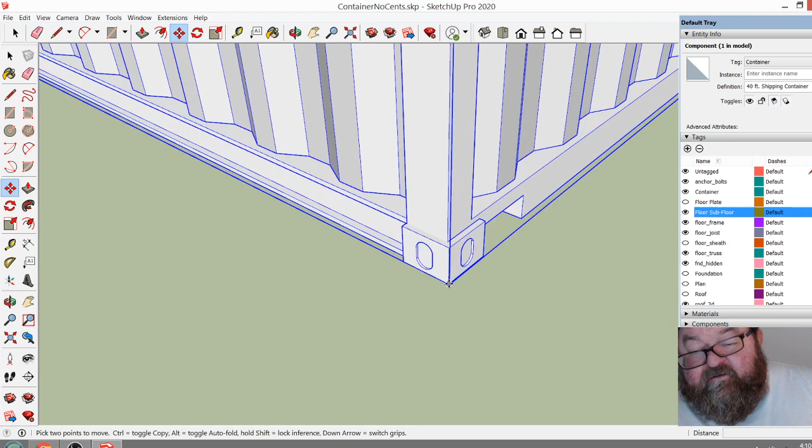But the point is that they're not designed to carry loads on the roof. I'll demonstrate this right quick. When you stack a container, there's actually a gap between the floor of the one above it and the roof below it. This roof is not carrying any load. This floor carries the load of everything inside—you might have 60, 70,000 pounds in a container—but that floor carries all of it. The roof carries none of it.

So when you start building a house on top of a container, you really need to reinforce it. Your building inspector is going to come and say, well, where's the header on your windows? So you're basically going to have to do all this framing that you would have to do anyway. And that's really the whole point I'm trying to make.

So the next thing I want to do is, I got this cool idea for a porch, and I don't want to spend a lot of time on the floor of the porch, but I'm not sure if... let me see if I got any questions.

I'm sure you know Tony, just pointing it out for the rest. Oh yeah, no, I'm agreeing with you, New York Outcast. Standard windows are crap. It's always good to get good ones, yeah.

Now, there's a window company called YKK, and it's kind of a builder secret. You don't see them if you go to your standard builder. Is it YKK? That's not it, not YKK. What is it, YKK Windows? Yeah, okay, I thought for a minute I was thinking zippers.

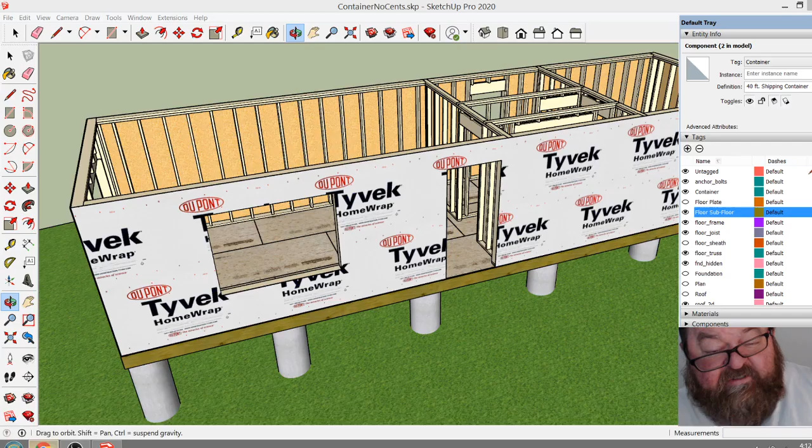But anyway, there's some really good vinyl windows in the industry right now that have good ratings, but they're affordable. If you go buy cheap vinyl windows that leak like a sieve, you're going to need big roof overhangs on your house just to protect your windows.

Yeah, I would never buy windows at a big box store. I'll buy framing lumber all day long from Home Depot and Lowe's, but actually I buy it from my local lumber yard. Sometimes when I'm in a hurry and just want to run in and get something, I'll go to Home Depot, but windows and doors I order through my lumber yard.

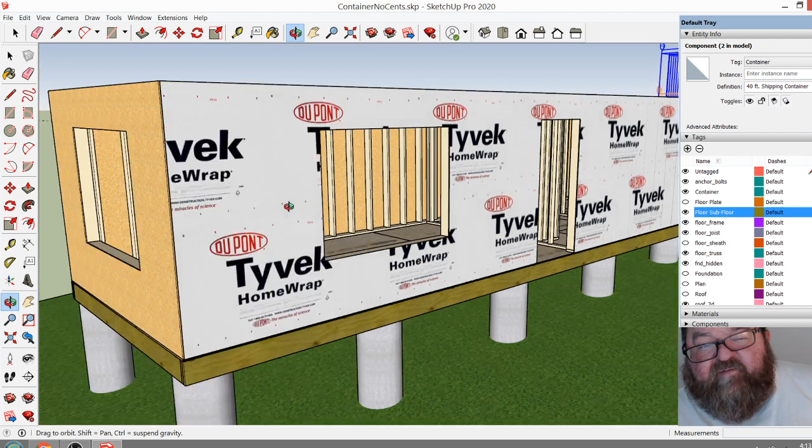For a long time I was a Marvin guy, back in the day when they were making wood windows. Back in the late '70s, early '80s, we were still using wood windows. Marvin made some really good wood windows, and for a while I felt like Pella did a decent job, but Pella came out with their Pro line windows, and they're junk—like crappy builder, spec builder grade. So you have to be careful. Even Andersen has a cheap line; you have to almost go to like Andersen Eagle before you get quality.

If anybody ever wants any advice on windows and doors, I can help out with that. But my point with this whole exercise is to show that you really want to do your framing, your sheeting, your house wrap, and then install your windows and then your siding.

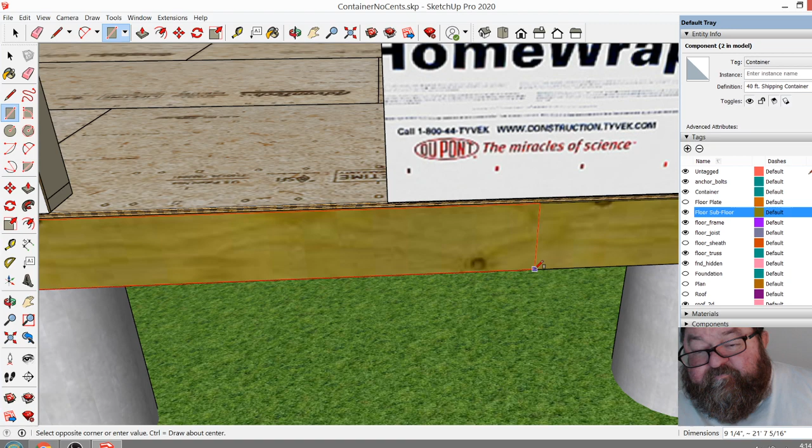But I had this idea for a porch, and I'm not sure if it would come all the way out to the edge—let's just say it does. I'm just going to draw a quick thing here to see how far this comes over. If I were to come to here, because I like using 21 feet... I don't know, let's just show it coming in there. Maybe it's 22—22 feet seems to be a little bit big. But then it would come out this way, maybe 10 feet, something like that. And then you would have steps coming down there.

But then what I want to do is try out this Medeek roof extension.

Let me save this right quick. I've never seen that message before. That was weird, some kind of exception.

Are we still live? Fix now, don't panic, everything's okay now. Okay, that was weird. Am I still here?

Sometimes I'll get a situation where I get that black screen, and then the video part will freeze, but the audio will keep going. Anyway, hopefully that hasn't happened.

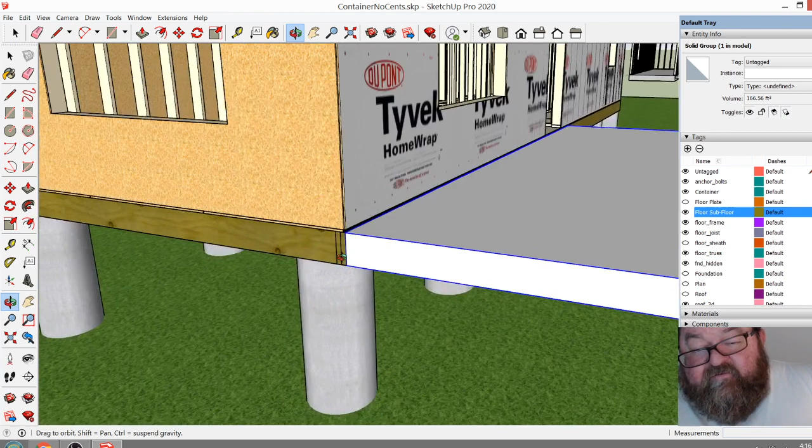But one of the cool things about, let me see if I can make a group out of this porch right quick. If I can grab just that, see if I can get lucky. I think I did, because I think I'm going to have to step this porch down. Might even be a step, but I don't want to do that. But if my idea pans out here, let me just do this, I'm going to try something real quick.

They have the roof truss and rafter extension from Medeek which is really cool. And I was playing around with this shed roof idea earlier. Let's see if I can get this to work right. If I can go to there, and go to here.

Uh-oh, I think I did that wrong. Yeah, I was supposed to go... let me start over again. Roof rafters. Nope, shed roof, yeah. I want to pick this point, then I want to pick this point, then I want to go all the way to here. Why is it backwards?

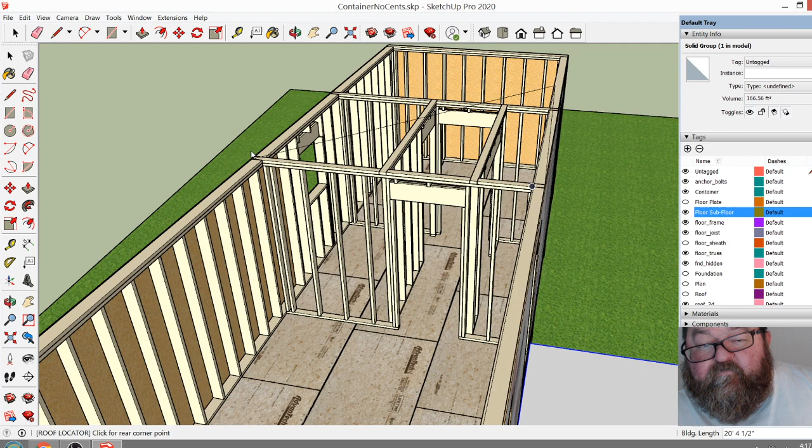What am I doing wrong here? Let me see something right quick. So I need to go this way, start over here. No, I don't want to go that way, I want to go this way. Yeah, I want to go this way. For some reason...

Let's start down here, I wanted like a sloped roof. Let's see, I might have to move my door over. I wanted a sloped roof to go over the porch and hang over. Let me try this one more time.

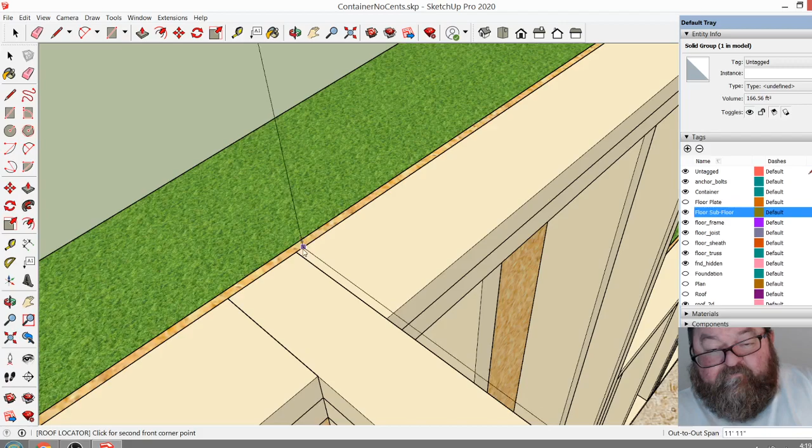I'm trying not to make this too hard to watch. You go there, I'll go here. There we go, I'm trying to back up so I can see where I'm going. There we go. So now what I want to do is... okay, I think it kept the settings from when I was playing with it before. Let's just do this, okay.

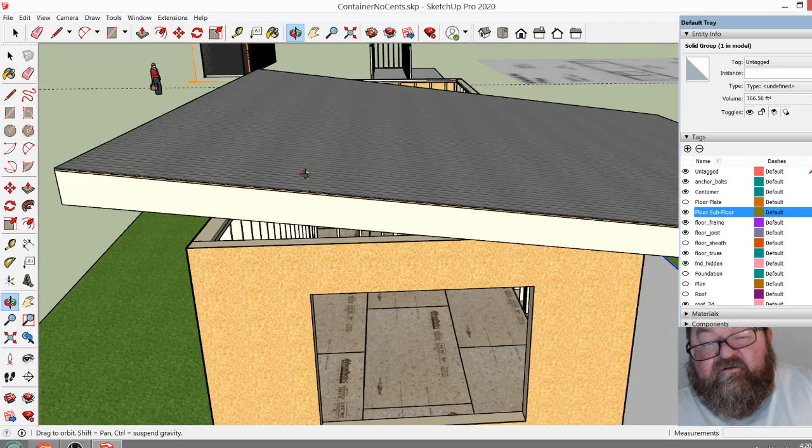What did it do? Yeah. I was coming up with this idea where you would have a roof that would be a single slope going that way, but it would hang over enough to cover the porch there, like that. But then you'd have to build this wall, this wall would be built up to there. And then what you would do is build another one to give it some interest, going this way. So this would be something you'd have to kind of work out. It would probably take longer.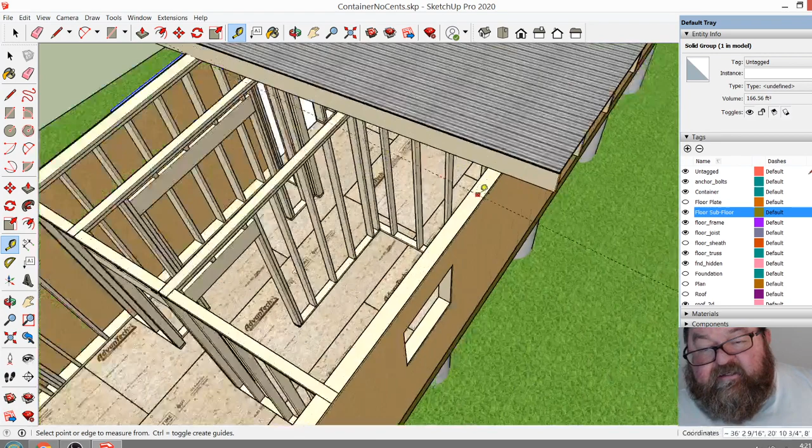Shed roof, is this going to slope the right way? Yeah, so this one would slope this way. And go - well, see, it keeps wanting to change on me for some reason. It starts out sloping the way I want it to, and then it changes. Let's put me a line across here, right here, construction line, and then maybe if I go in this direction it won't give me a hard time.

Okay, yeah, that's what I need to do. And then now this one wouldn't have the weird overhang. It would just have 24 inches there, and so the rest of it should be okay. Okay.

So you can have these alternating. Yeah, see, I think that would be kind of cool, I don't know. But what you'd have to do is... the point is that you could come up with a cool roof design that was real simple.

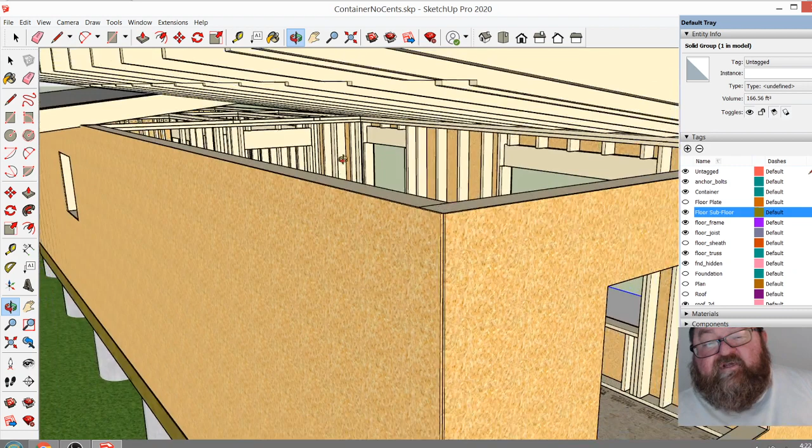So all you would have is just single slope roofs, but your walls would be - what you'd have to do, and what I'd have to do with this extension, is I'd have to separate these walls in order to frame it all the way up to there. But that's what you do. I mean, you could build standard height walls and then add to them, but the best thing to do would be to build this wall up to there in one piece and make the wall stronger.

The options are unlimited really on your roof. What this would do is give you a little porch, with steps coming up here. You'd really have to let this all play out, draw all the siding. What I may do is look at some other ideas, come up with some roof designs, and then maybe in another video work on that.

Let's see if I have any other comments or questions. Let's see... always custom order windows...

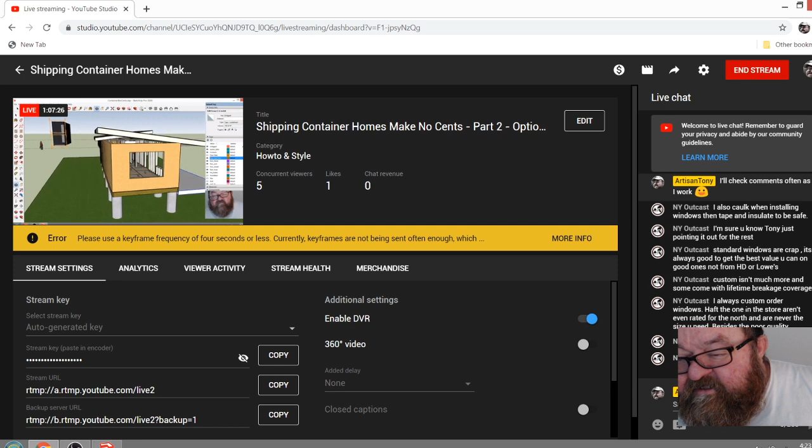Half the ones in the store aren't even rated. Yeah, you got to be careful on your window ratings, especially the wind and air leakage and moisture leakage.

Sorry for the spelling, I got to get back to it. Oh okay, thanks New York Outcast for coming and participating, I appreciate it. So the point is, I'm going to have to probably do the material list thing.

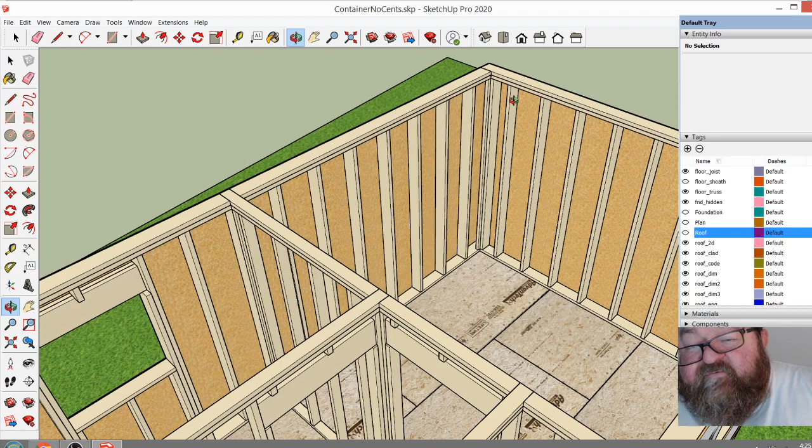Do we have enough time? What I was going to do is count all the studs, count the floor joists. Well, I can tell you this: we figure one stud per linear foot, and your studs are on 16-inch centers. But if you figure one for every foot, you'll have extra studs for your corners, your tees, your trimmers, so you get kind of close. It gets you close, it's not perfect.

But if we did that, we would have 40 and 40, that's 80, and 12, so 24, that's 104. Then we got 12, 24, 128. Then let's just say that's 136 and 146, so let's say we have 150 studs. That's a fair number. I can tell you right now you can buy those for about $3.50 a piece at Home Depot.

Excuse me if I did this in a previous video, I'm gonna try to remember what I've done, but studs—what I'm going to eventually do is a complete framing list, because people will argue with me about this. Yeah, 356 for 92 5/8 studs.

Okay, so right there, let's get our calculator out. Somebody's trying to call me too. Haiti, oh my God, Haiti.

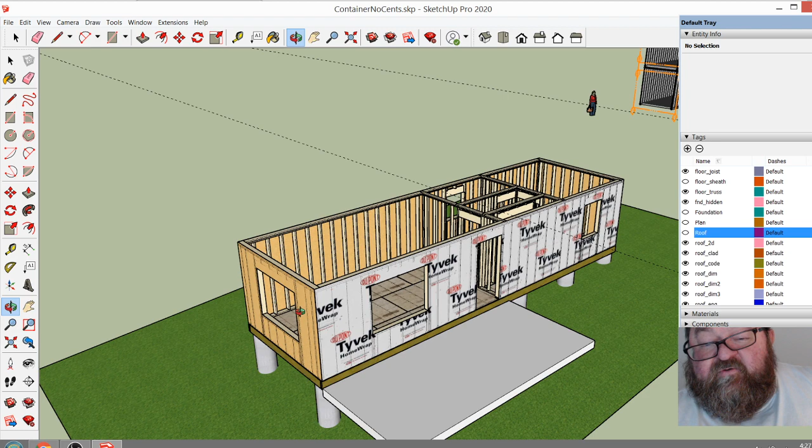If we had 150 studs times 3.5, that's $525 for the studs for this whole thing. Now you would have plate material, so what you would do is come up with your linear footage again.

Now for sheeting, we've got another 40 and 40, that's 80, let's see, that's 10, 20, 26 sheets to go around, and let's say it's $8 a sheet. 26 times 8 equals 208. So what are we up to? $1,200. We'd have 2x10s for our headers, another couple hundred dollars. Let's just say, to be fair, $1,500 for all the wall framing and sheeting.

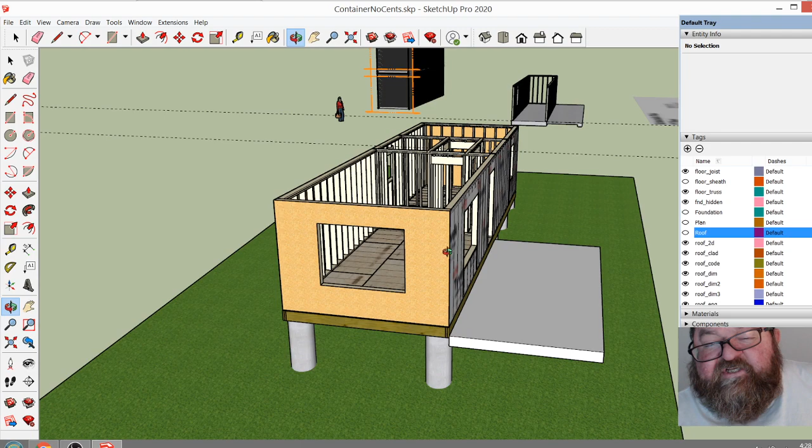A roll of Tyvek is 150 feet long, and you can go around this entire house with one roll. It's around $100, I think, the last time I checked.

Okay, now let's look up 2x10s. I think you see where I'm going with this. I could spend probably another hour and come up with the roof cost, the rafters, the decking, the Advantech. Advantech's kind of expensive, it's like $32 to $38 a sheet, but I'll go ahead and pay that because it's such an advanced material.

All of that would be less than buying a container. That gives you nothing. It gives you a rust bucket.

In the next video, I'm going to put some windows and doors in, finish the roof, and then we'll put the siding on. I'm going to put siding on here called R panel. You can look it up. It's got the same profile as the containers have on the side.

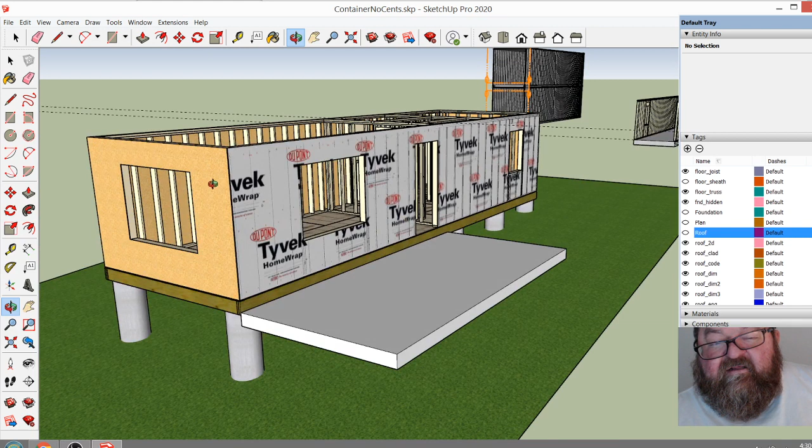If you really want to make it look like you've got a container home, which I think is kind of silly, but if you like that kind of thing, there's siding you can buy after you've properly put all your framing, Tyvek, and windows up, all taped and caulked, and then you put your siding on.

Your house literally should be able to withstand rain without any siding on it. Your siding is like a rain screen. That's how you should approach your house, and the way you build it.

All your joints on your Tyvek would be taped, everything sealed up. After you put your doors and windows in and got your roof on, your house would survive probably 5-10 years that way. Siding is just a rain screen.

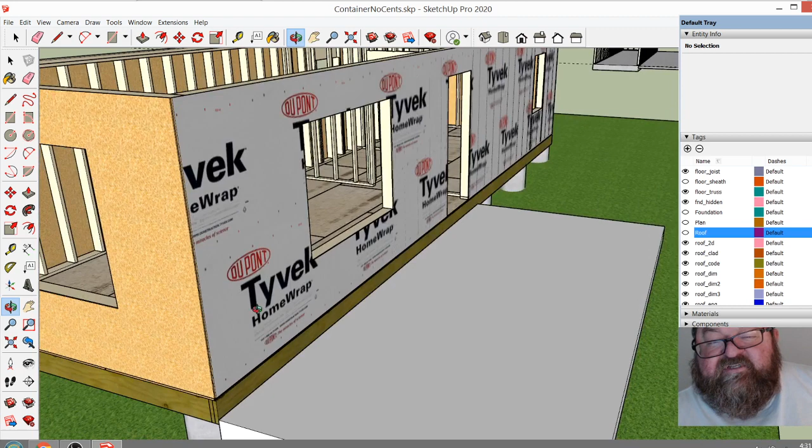It's aesthetic. It aids in keeping rain and weather out of your house, but it's not what people think it is. The function it serves is supposed to be more than what people give it credit for. So you think you're buying a house when you're buying a container, and really you're not. You're just buying a big rust bucket.

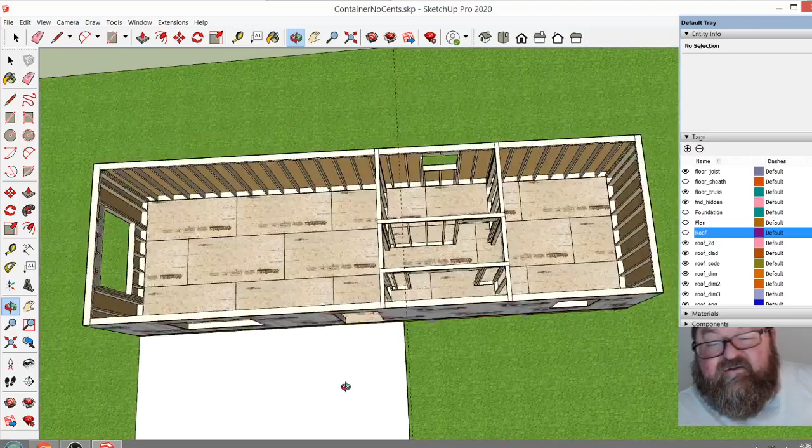You should be questioning everything. The mentality that some people have, that just because someone's a big YouTuber and they're doing something, that it's correct or proper, there's some kind of syndrome there on YouTube that really shouldn't be that way. If you see something and it seems odd, you should question it, and you shouldn't feel like you can't question these things. Question away. Say, what about this? What about that? I'll be happy to answer questions.

But if I've gone to other videos or whatever and tried to offer advice, you just get lambasted by their fans, like these people are gods or something. It's just really silly, and there's no intellectual honesty. There's very little intellectual honesty on YouTube.

So what I'm trying to do is show you that here's a way, if you want a tiny home and you want it to look like a container, here's a way to do it. Make it a decent width, an efficient width, have some room to live in there, make it cheaper, more efficient, more energy effective. This home, after I get through with it, it's going to be 10 times better than a container as far as energy efficiency.

So anyway, I'll get off my soapbox for now. Let me go back to see. Let's see.

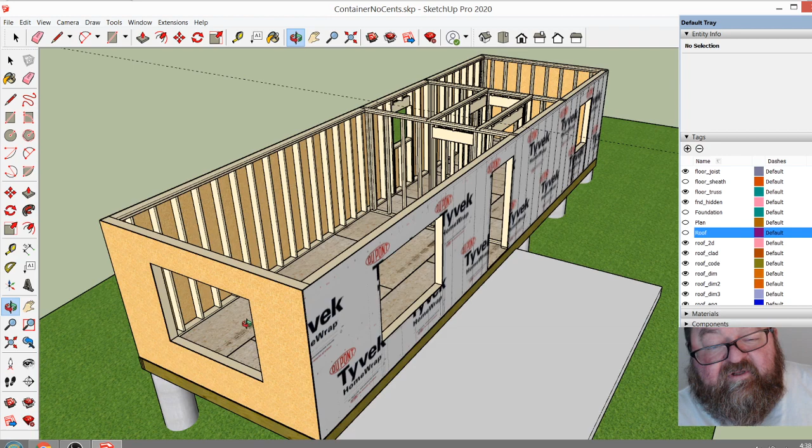Thanks. I'm not trying to sit here and brag about my certifications. What I'm trying to do is, if I ask a question about something, a lot of people will act as if I am... basically the response you get on YouTube is, and it's not actually from the people themselves.

I remember when I made a video about, what was her name, April Wilkerson. April Wilkerson didn't have a problem with anything I was asking. I made a video on a better way to build a carport than she was building. And she's this cute girl, a hot girl, and she's building things. Well, of course, all these horny young teenagers were fanboys, and they jumped on me like crazy. All I was trying to say was, well, here's the way you can build a carport without spending a lot of time and money, and it's stronger.

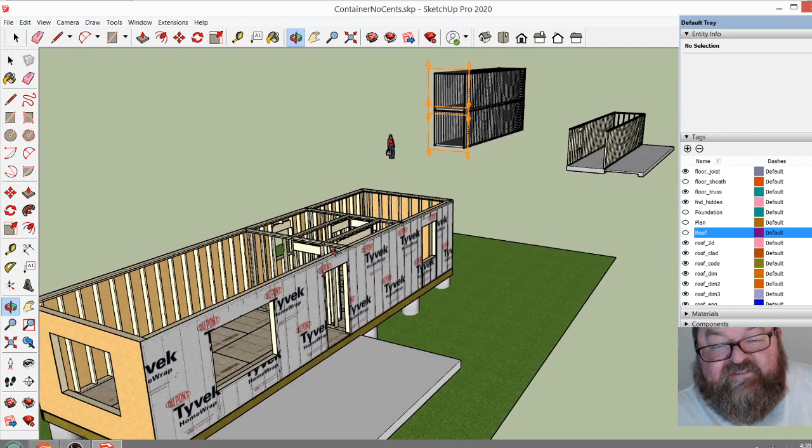But I remember that, and I don't know, I think I have PTSD from that, but I shouldn't have said that. That's putting it lightly. I don't want to make light of PTSD, but I'm saying I still remember the response I would get. And then just recently with this other YouTuber whose roof system I kind of questioned, again the fans came out in droves, and I basically had to turn the comments off of that video.

So what I thought I would do is just do a positive series here on showing people how they can do it and save money, but still have a more energy efficient home, have space to actually live, and all that. So I think that's positive. Let me turn my little roof on here.

In the next video, I'm going to try to work out some kind of roof that's kind of simple and easy to build, but also cool looking. I'll check the comments one more time. If there's no other questions, we'll cut it here, and we'll start again next time.